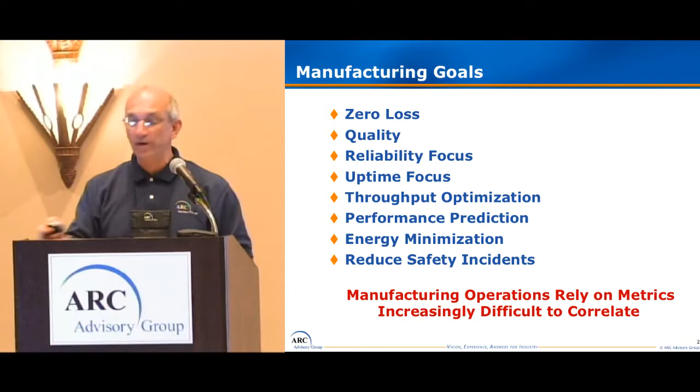So the other thing we're finding is some of the traditional statistical process control techniques are having diminishing returns within these operations as well. So what we need to do is find a solution which can address this loss of operator knowledge, the diminishing returns from some of the techniques that have been employed for 40 years in the manufacturing operations.

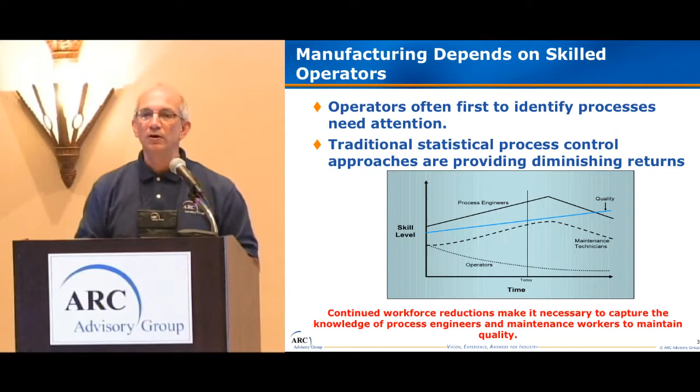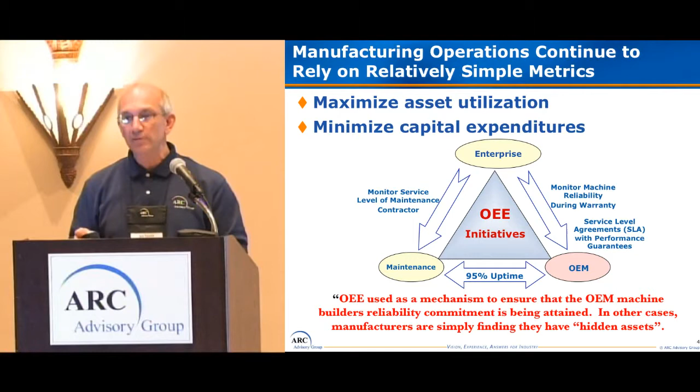So some of the metrics that we typically see in these operations today, for example, to try to manage productivity are still what I would call relatively primitive. OEE, for example, is quite often used to really provide a metric for availability, performance, and quality, all wrapped in one metric. What this doesn't do for you is really identify root cause problems, identify really what's the source of the problem. So what we're finding, this is a good metric, but not providing those real returns on improving operations today.

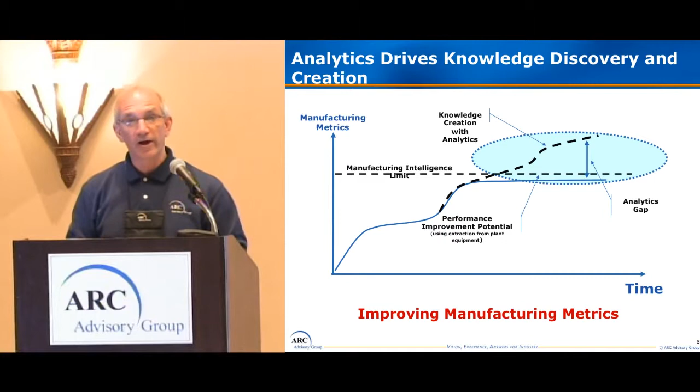So what we're looking for is analytical tools that can rapidly recognize trends in production. So they'll be looking at historicals as well as continuous flow of information coming from the various pieces of equipment. So what we need to do is shorten that time from when our production is going out of spec and bringing it back into spec, because there could be hundreds of particular control parameters that may be associated with driving a production process out of spec.

The other thing is more and more companies, if you think about it, are moving from long production runs to more or less batch operations. And this ranges from tire production, where there used to be a lot of inventory stored, but now they're going to just-in-time production, to even automotive facilities where production runs are just simply becoming shorter. So what does that mean? We need to rapidly identify startup problems, because loss in production on the front end of startup problems is too much of a cost.

So this means today we want to drive our operations toward data-driven decisions and instilling within your environment the notion that we're collecting data and we can take corrective actions based on analysis performed on the data. And the other part of it is we want to decouple the operator as much as possible. Decouple the operator from providing the knowledge that they've brought in over the years, because we want to become less dependent on it. I'm not saying it's not great to have great operators that know things, but we need to be decoupled.

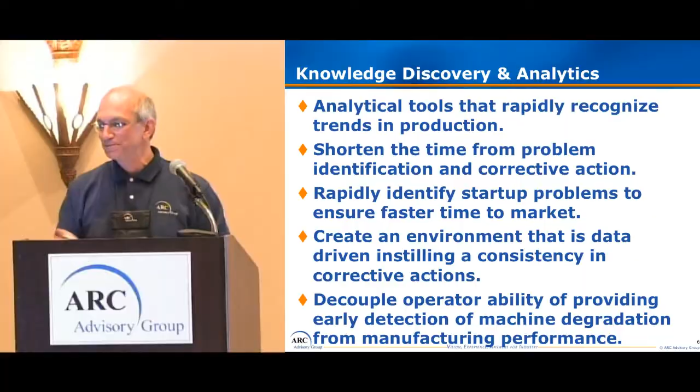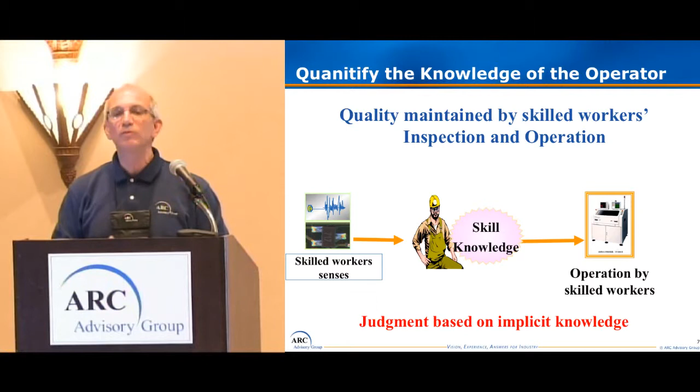In fact, it depends upon the operator's feel of that particular piece of metal. And there's no way to measure that. There's no way that they've been able to put a sensor on it and detect, that's a good piece of stamping. So they are in the loop for early detection of where on the die that stamps out that particular hood part. And there are many other examples like that, whether it's in the machine tool industry where you're cutting a part and you start to hear chatter or certain vibrations, sounds that just aren't normally there. So the operator has become an integral part of that early detection of problems occurring in the system.

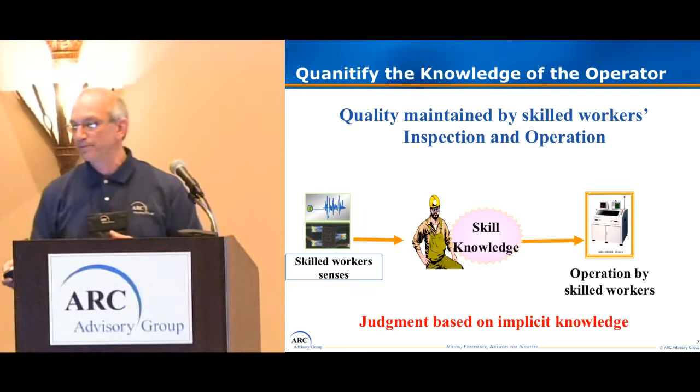So what we want to use is analytics to identify some of these really obscure, difficult problems that are incurred in the manufacturing operations today. And so we want to use them to determine the root causes of product quality deficiencies.

There can be hundreds of really critical process parameters that need to be addressed to really keep the quality in line. So what we need is more intelligence, more analytics to really identify the critical parameters that are driving a system out of spec.

And then furthermore, we need to be able to predict, because what's happening today is incoming raw materials are often inconsistent. So how can we predict how to configure a manufacturing or a production line based on these raw materials, which are not within the normal specifications or within a range of specifications that we can manufacture with?

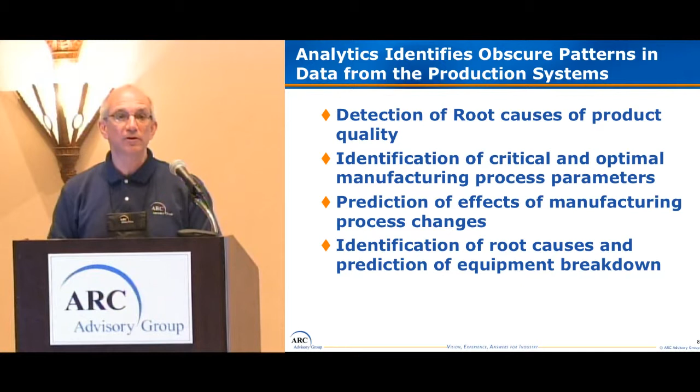So there's a lot of things that we're looking to achieve with analytics in terms of identification of root causes as well as setup of the machine. Furthermore, we totally expect the analytics will take us to a new area where we can predict failures or degradation in equipment going forward.

So fundamentally, I just wanted to give a feeling for what some of these analytical techniques are today. We're talking about regression analysis, looking in the past and moving it into the future in terms of analyzing lots of data. Classifying groups of data so that we can look at inputs and outputs of production operations in ways that we hadn't looked at before.

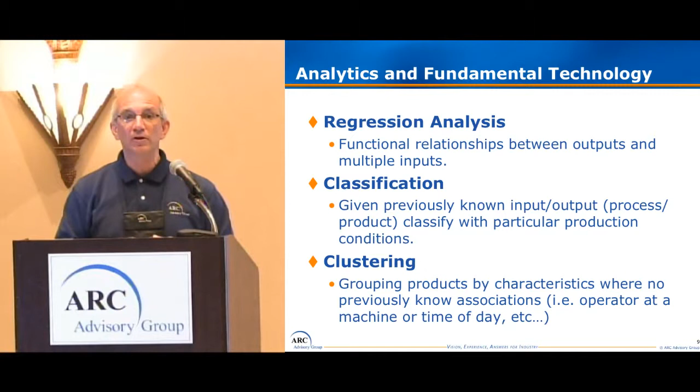Clustering information. A lot of these techniques, I've heard the example in some of my literature reading and some of the things even topical here today. Some of these analytics are the things we see happening with Google, whether it's search engines. Somebody mentioned Netflix the other day. Good example of how a lot of these analytic tools are being used in the consumer world as well.

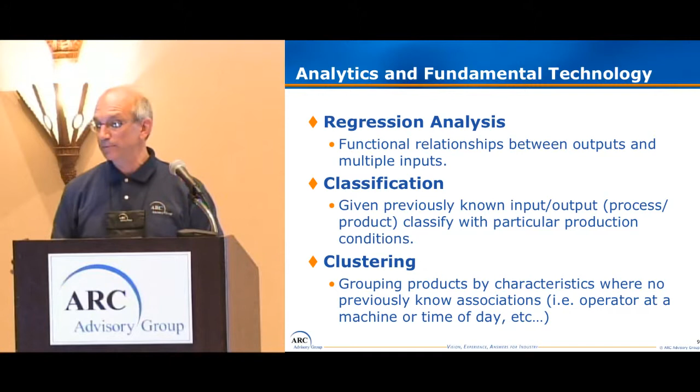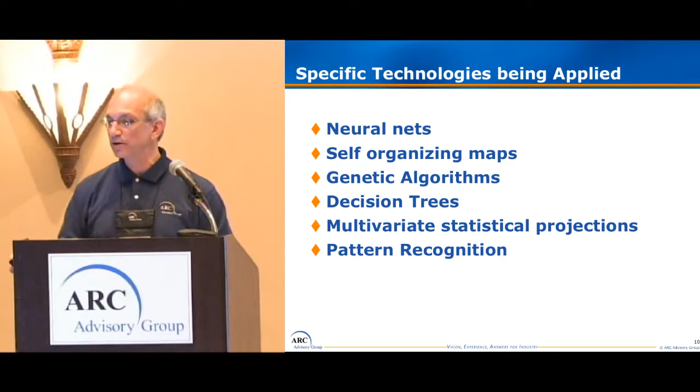So a lot of the technologies, maybe some of you have heard of them before, are just coming on, and some of them may or may not make it. Neural nets is a big question mark in a lot of minds. It's very difficult to set up, but they have been used in some of these analytic tools. Self-organizing maps, genetic algorithms, decision trees, multivariate statistical projections, and pattern recognition. That seems to be a lot of emphasis being placed in that particular area.

So over time, with the use of analytics and bringing it into your operation, what we expect is to see knowledge discovery. Start to take the operator out of the loop and bring that knowledge and embed it, whether it's into the machinery itself or within the production control systems around the machinery.

This will certainly require more data sensing. It'll require more intelligence in the machinery, for example, to even start to collect that data. So we have ways to go in terms of starting to build more and more knowledge discovery.

In fact, I was just reading another article just the other day. I hadn't brought it into this presentation. Oh, what did I do? Oh, thank you.

It was talking about Toyota. We all know that Toyota is fanatical about the Toyota production system control techniques. And here's a comment about Toyota. It says, what Toyota has done is to accumulate past examples and data from the entire Toyota production group in a systematic, stratified, and electronic format, and then use office automation to analyze this, to derive answers to most problems and issues.

But the author also says the company has been spending 5 times what other companies do to collect data, with the result that nearly all problems can now be solved by using past data. This approach constitutes, in essence, an enterprise-wide application of data mining to improve a wide range of functions within Toyota, including product quality and reliability.

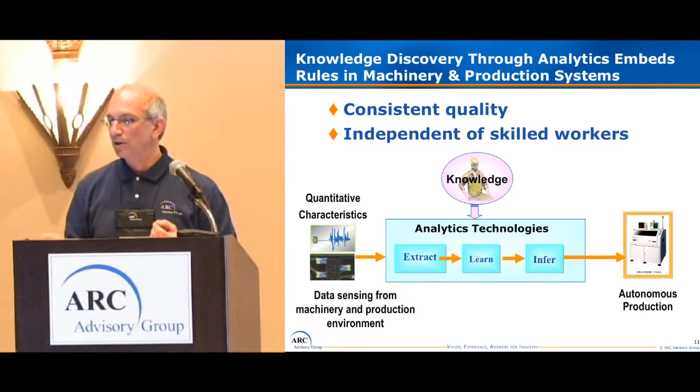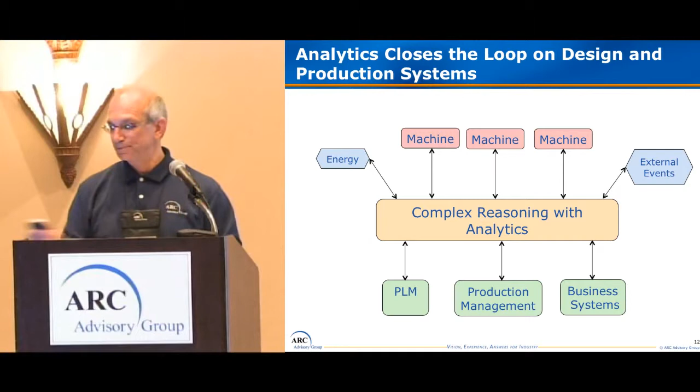So in the future, what we're looking at is information-driven manufacturing. That is the extensive use of data, statistical and quantitative analysis to explain and predict and provide predictive models. So it's fact-based management. And this will drive decisions, it'll drive actions throughout the entire business. And analytics will be an input for either human decisions or drive more autonomous functionality within the machinery in the future.